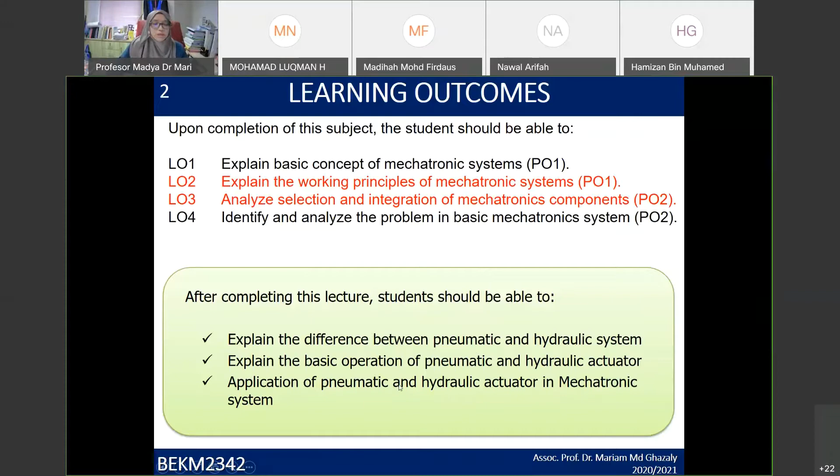So let's just do a recap on what you have learned previously. By now, up until this week 8, you have known that there are three main components in a mechatronic control system. The first one will be the measurement system over here. Second one will be the actuation system. And third one will be the complete system, which is the control system. What you have learned so far was on the sensor, signal conditioning and data presentation system.

And today we are going to concentrate on this actuator system, which is hydraulic, pneumatic, electrical, and mechanism. Why I didn't put the mechanism inside here is because normally the mechanism or mechanical actuator will be included in the actuators, together with the hydraulic actuator, the pneumatic and the electrical. So, actuator. For example, I give you a power steering system.

The previous power steering systems used a hydraulic actuator, but this hydraulic actuator was combined with a mechanism, a mechanical actuator, having gearing and a rack and pinion. So this is what we call a combination of actuators under one system. Power steering systems have hydraulic plus the mechanism.

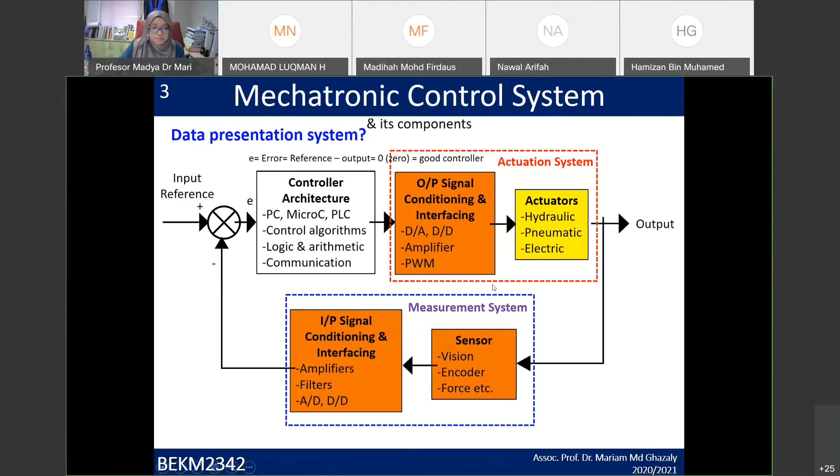Okay, so here we go. What are actuators? Actuators are devices used to produce mechanical movement or motion in a system.

For example, you have a mobile robot. How does a mobile robot move? You need to have a DC motor. This is what it means to produce mechanical movement or motion in a system, so it's going to move its place either left or right depending on what type of mechanism movement you choose. There are only two types of movement, which are linear and rotary.

Second, the input is generally an electrical signal, air pressure, or fluid motion. This is the input to the actuator. For electrical actuators, the input is an electrical signal, either voltage or current. For an electrical motor, normally it's current as the input signal. For voltage, for example, a DC motor is voltage. And air pressure, where does the input air pressure come from?

Air pressure is for a pneumatic actuator. And for fluid motion, or we call it fluid pressure, compressed fluid, this is what we call a hydraulic actuator.

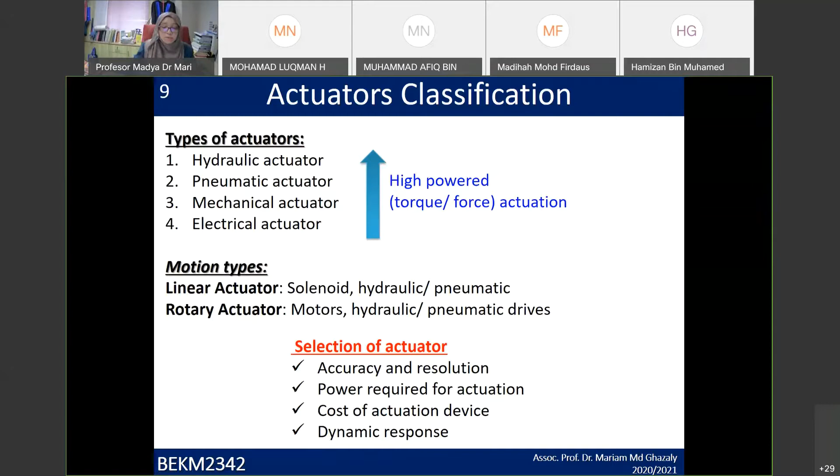Okay, Afiq, do you want to say something? Is your mic on? Alright, so...

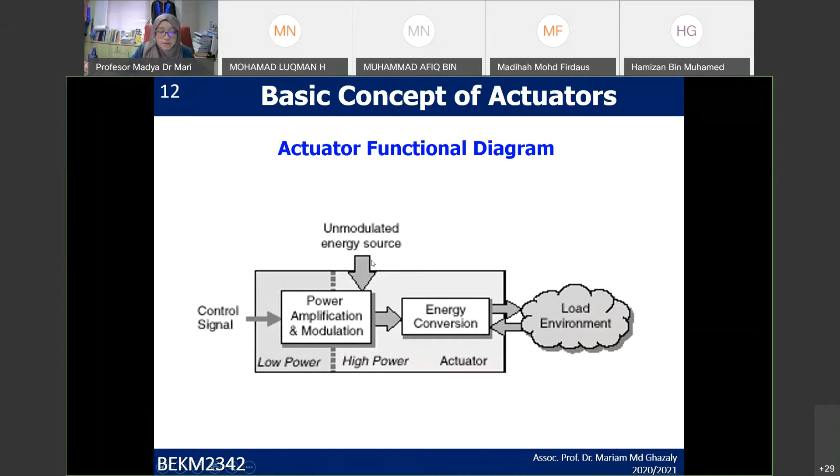And we have the control signal. Is it low or high? If it is low, then you have to have the amplifier, and this is where you have the signal conditioning. If there is noise, then you need to filter out the noise. External energy sources, this is an example of what I mentioned about the external disturbance.

Now we go to the interesting part, which is the types of actuators. I mentioned only three main actuators: pneumatic actuator, normally we call it a cylinder. Then we have the hydraulic actuator, we call it cylinder or motors, normally cylinder as well. And the third one is electrical actuator: DC motor, AC motor, stepper motor. Sorry, typo error.

So where is the mechanical actuator? The mechanical actuator is embedded in all these three actuators. So if you ask how many types of actuator, there are actually four: pneumatic, hydraulic, electrical, and mechanical. But we don't call it a mechanical actuator, we call it a mechanism. Under pneumatic and hydraulic actuators, we have two normal types: single acting actuator and double acting actuator. Let's look at what that means later on.

So what is a hydraulic and pneumatic motor? Pneumatic power is an air powered cylinder, meaning the input to the actuator is compressed air. Imagine that you have a bottle, or a syringe for example. You put air in and then you press it, then you will feel the force there.

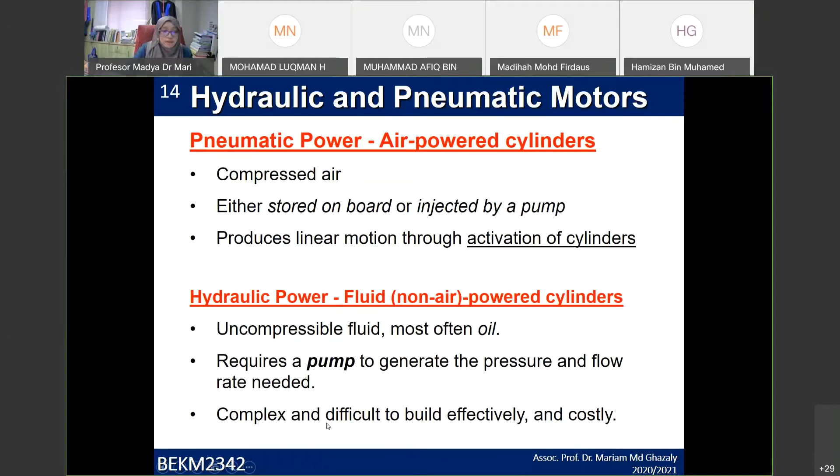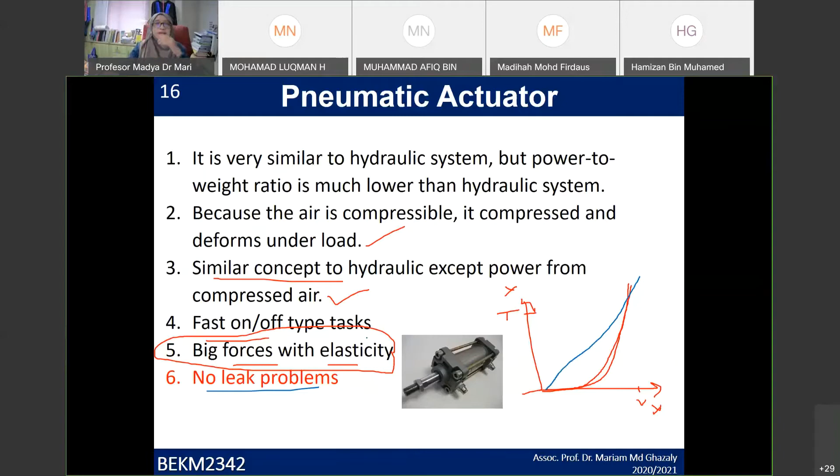That's why sometimes if your hydraulic system is leaking, then you have the fluid going out. Then you cannot apply the brakes, because they're leaking. The fluid is going out, and you cannot actually compress the liquid anymore. So that's why sometimes you have a faulty braking system.

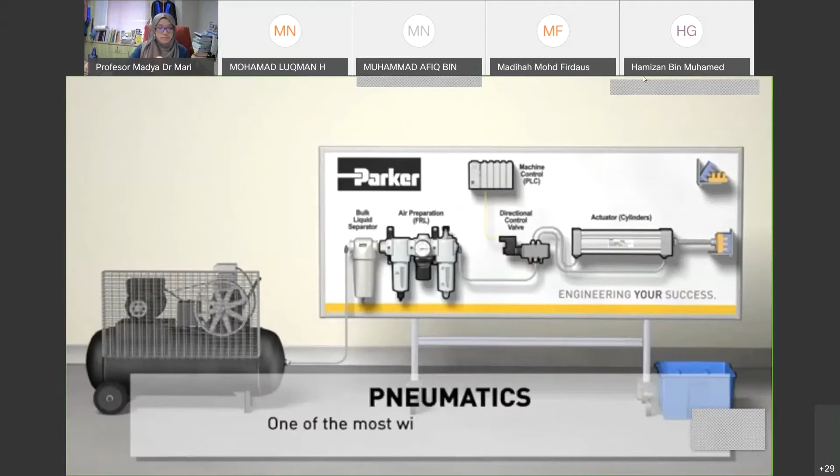Common elements used in these systems. The ultimate goal of this entire collection of components, in most cases, is to create motion that will do some type of work in an industrial setting. Pneumatics is one of the most widely used technologies to automate repetitive processes. Some common applications might be to move product from one place to another, or to press or clamp pieces of a product together. To best understand how the system works, we will start at the beginning with the compressor and follow the process through to the end goal of motion.

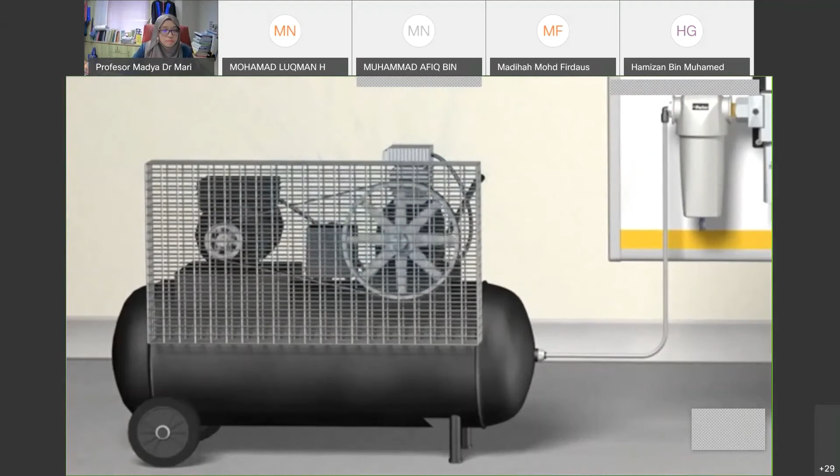The compressor generates the energy that powers the system in the form of compressed air. In order to generate compressed air, the compressor draws in atmospheric air from its surroundings and squeezes it or confines it into a smaller space, creating the energy needed to drive the system. Once compressed, the air needs to be dried and cleaned so that harmful particulates such as rust or dirt do not clog up the moving parts of the system. The compressed air will travel through a tube or line to the next component, called an air preparation unit, or FRL. FRL is short for filter, regulator, and lubricator, which are common pieces that make up the air preparation unit.

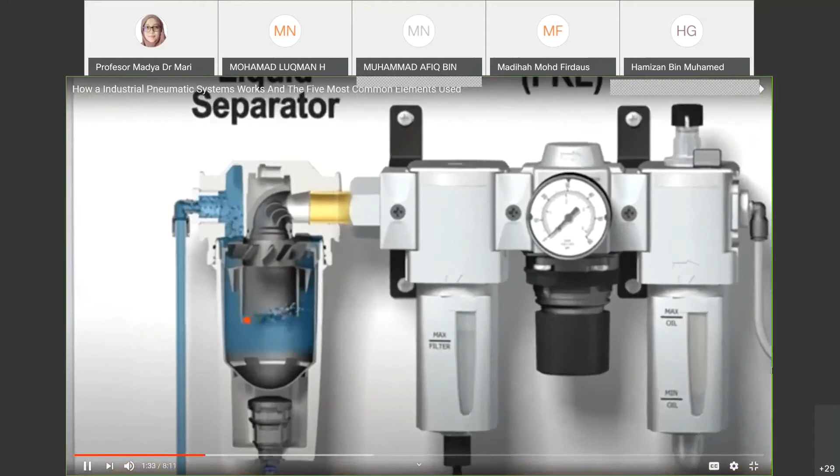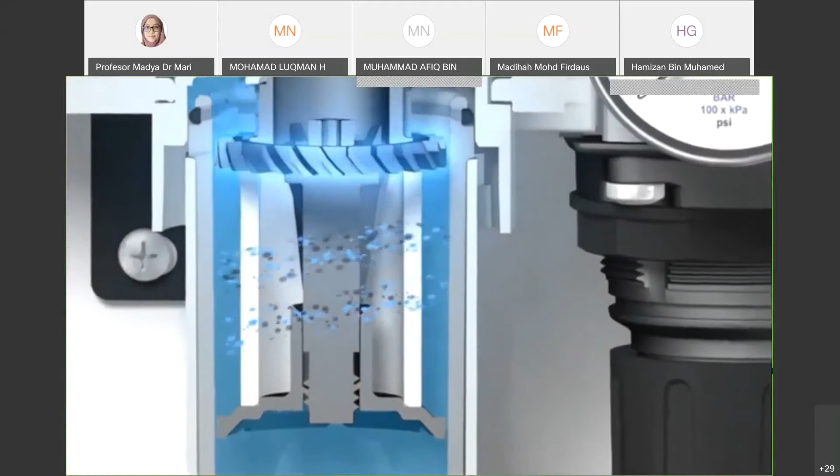Typically, the first unit in the air preparation system is what is called a bulk liquid separator, which circulates or spins the air using specially shaped vanes. The rapid circulation of the pressurized air sheds unwanted moisture due to centrifugal force. The next unit is a filter, which further removes particulate and moisture in a two-stage process. Just like in the bulk liquid separator, a series of vanes or louvers in the filter circulates the air in the first stage. In the second stage, the air passes through a screen of sorts, called an element, in order to catch unwanted debris.

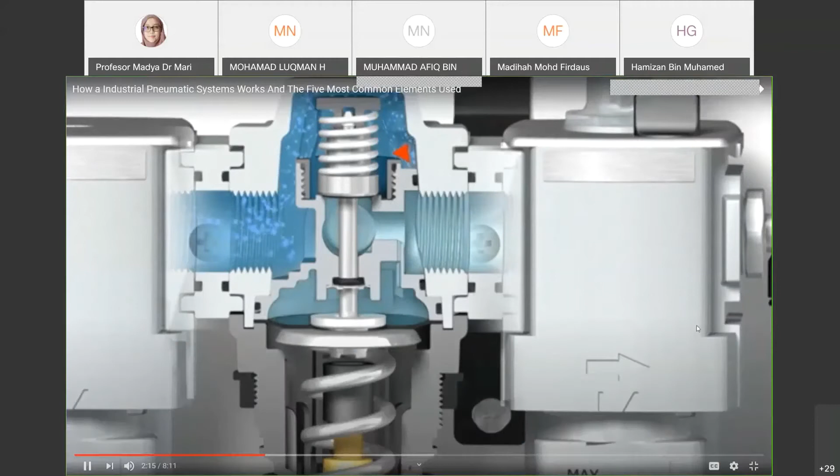Once dried and cleaned, it is common to adjust the level of air pressure coming out of the compressor. This adjustment has an impact on how much force the system generates. Higher pressure allows the actuator to put out more force, and lower pressure creates less force. The regulator achieves this using a spring-loaded assembly. The knob on the regulator adjusts the force of the control spring to achieve a desired pressure set point. Whenever the downstream pressure level drops lower than the desired set point, the poppet, or internal valve, opens a pathway for the higher pressure upstream to flow downstream. This continues until the pressure in the system reaches the regulator's set pressure. At this point, the poppet or internal valve closes until there is a new downstream demand. It is also common to have a pressure gauge on a regulator so the user can monitor downstream pressure.

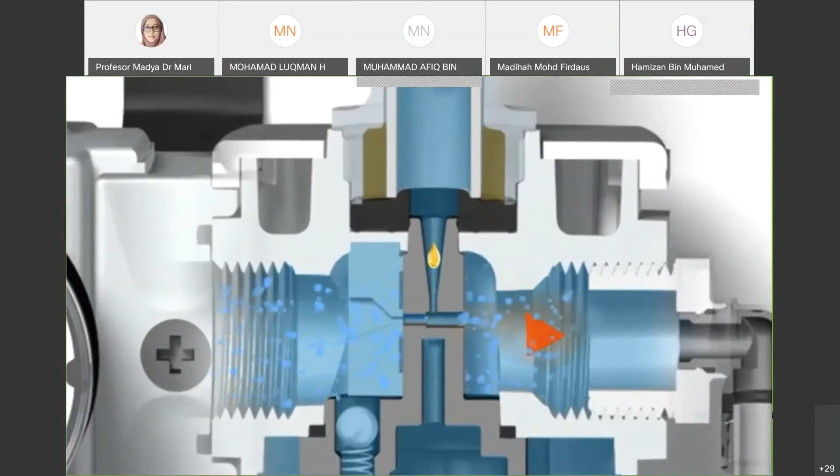Finally, in specific applications, such as air motors or pneumatic tools, a lubricator can be added to distribute a fine mist of lubricant into the compressed air to help lubricate downstream components. Now that the compressed air is clean, dry, and set to the correct pressure for the application, the next step is to direct it where to go to create motion. A directional control valve is used to achieve this task. This directional control valve has a series of internal pathways that can connect the air coming into the inlet port with one of two avenues to leave the valve, called working ports.

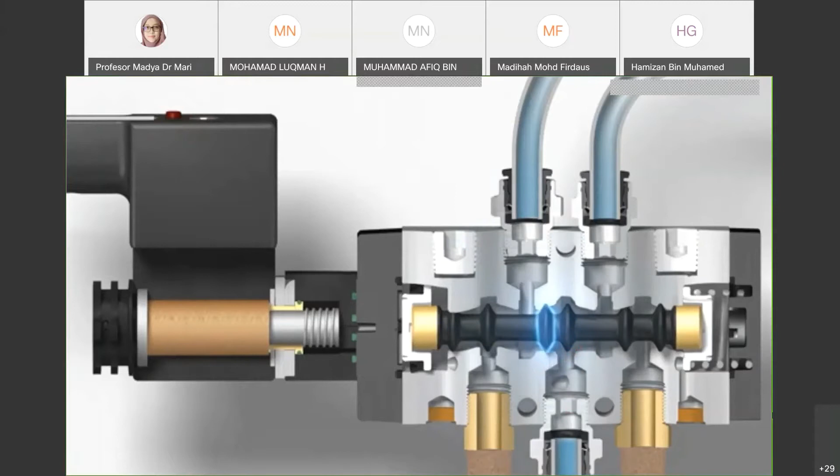Depending on the position of the moving element, which is typically called a spool, the air will be blocked from traveling down one pathway and allowed to travel down the other. The high spots on the spool, called lands, will block the air from proceeding down one path, while the lower sections on the spool, called grooves, will allow air to flow around them and proceed to one of the working ports. In this common type of valve, when the unit is not activated, the spool is forced to the left side of the valve by a spring. In this position, you can see that this land blocks air from going out the number 4 working port, and instead is forced to go out working port number 2, because the grooved lower section of the spool allows air to flow past it and out to the number 2 working port.

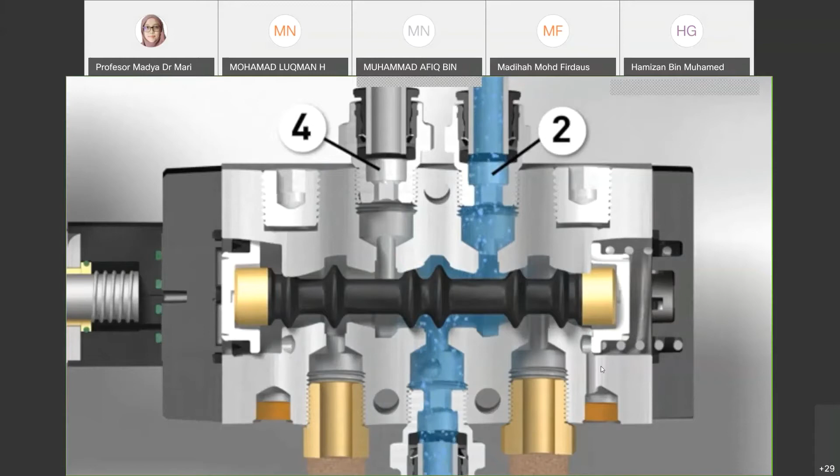In order to change the direction of the air to the number 4 working port, the valve needs to be turned on. In most automated equipment, a PLC, or programmable logic controller, will instruct the valve to shift using an electrical signal. When the signal arrives at a portion of the valve called a solenoid coil, a magnetic field is created that pulls a cylindrical piece called a plunger towards it.

When that plunger is unseated, it allows air from inside the valve, known as pilot pressure, to push the spool to the right. Once the spool reaches the far right side of the valve, the lands or high spots are now closing off the passage to the number 2 working port, and instead directing the compressed air to flow to the number 4 working port.

When the signal from the PLC is removed, the force generated by the electromagnet is also removed, at which point the spring on the plunger returns it to its normal state, which removes the air signal that is pushing on the spool. The spring on the opposite end will return the spool to its default position once again, directing air back out the number 2 working port. The PLC can now direct air to whichever port is needed, whenever it is needed.

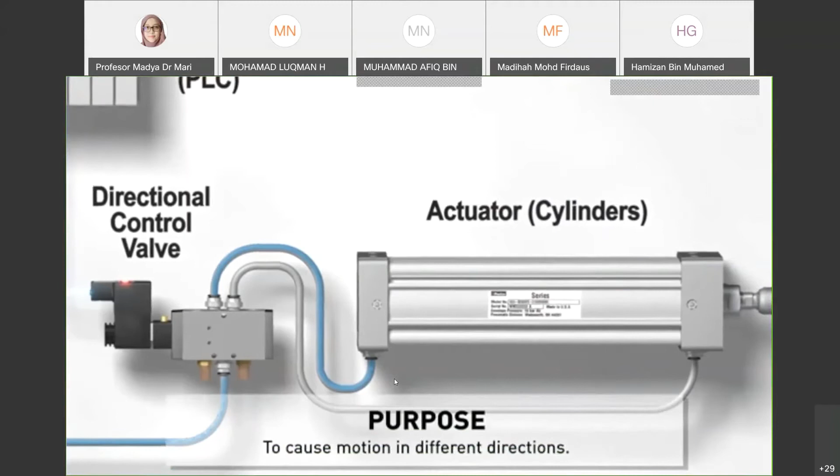The next component in the system, the actuator, will allow us to do some useful work with the air we compressed, cleaned, and redirected. In most applications, the purpose of changing the direction of the compressed air with the valve is to cause motion in different directions. Parker makes a wide variety of actuators, or cylinders as they are also commonly called, that will convert compressed air into motion. The most common type of cylinder is the rodded variety displayed here.

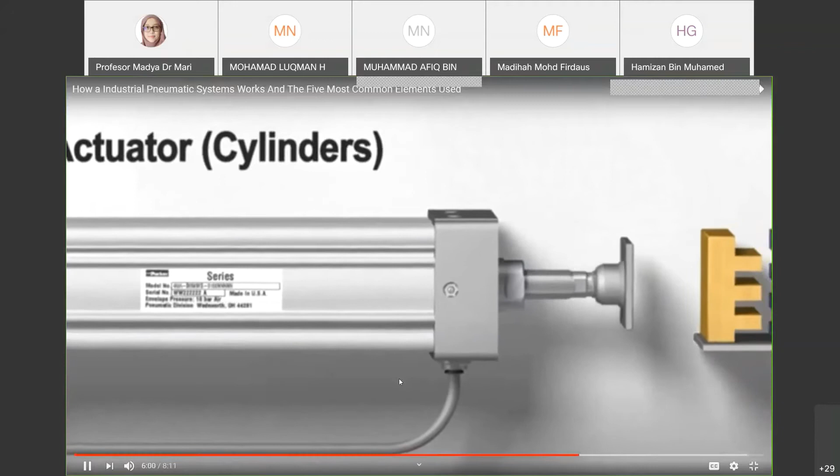The actuator will create motion using the energy of the compressed air that is supplied to it by the directional control valve. We can see that the working port number 4 is connected to the back or cap end of the cylinder. When the compressed air pushes on the piston, it is forced to move forward inside a hollow cylinder that is commonly called the body. The piston is attached to a rod that will extend as a result of the force generated by the compressed air acting on the piston.

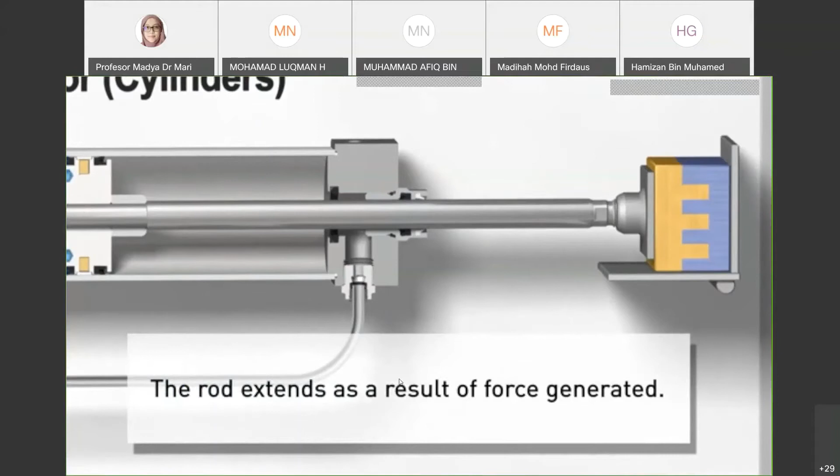The actuator will continue to move in that direction until it reaches its physical limit, or if the force resisting motion, commonly called the load, is higher than the force of the compressed air, in which case the pressure regulator can be adjusted to a higher pressure. Now that we have completed the extension, we will need a method to retract the actuator to its original position. The directional control valve will achieve this by changing the direction the compressed air flows from number 4 working port to the number 2 working port.

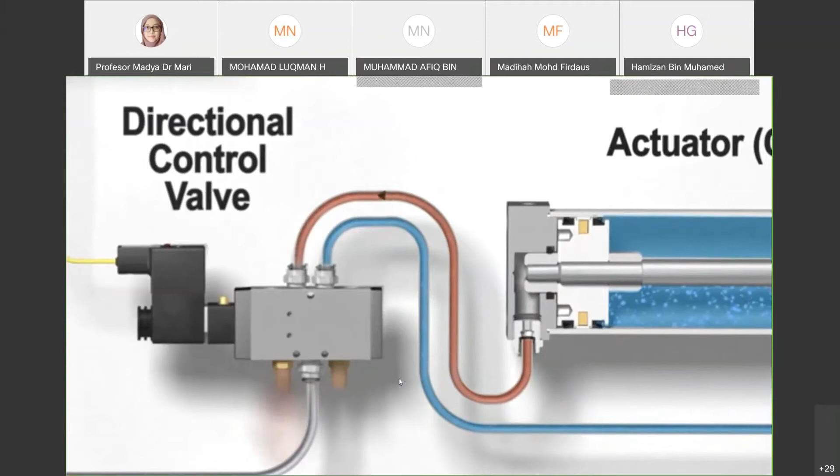The number 2 working port is connected to the head end of the actuator, and when the compressed air pushes on the opposite side of the piston, it will reverse the direction of the piston rod assembly. This reverse motion is typically referred to as retracting. For this actuator to retract, the air that is already filling the cylinder needs to go somewhere, which is commonly referred to as exhausting. The exhaust air is illustrated by the red color and is shown exiting the cylinder and flowing back through the valve, out the muffler to the atmosphere.

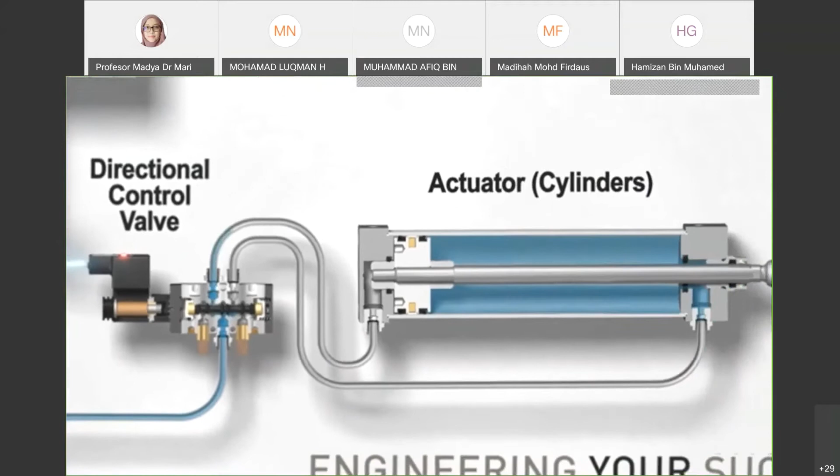This system can repeat this process as often as the PLC tells it to move things from point A to point B in one example. In this example, the PLC is telling the actuator to move this product by sending a signal to the directional control valve, which is using the clean, dry, compressed energy to power the actuator. Pneumatics are also commonly used to press two components together in an assembly process to help form a finished good.

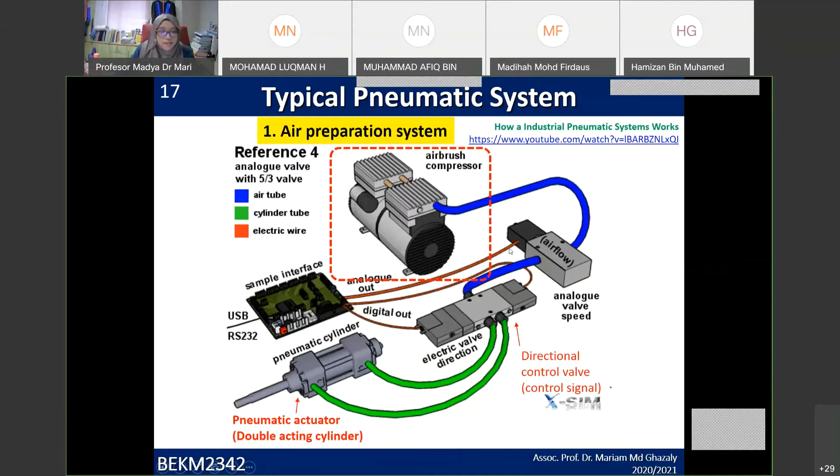All right, so you have seen the video just now. So basically the video explains each of the components. It's explaining the air preparation system, the valve, and the actuator. So what it explained just now is the working principle of the actuation system. So I'm going to skip here, because it's already been explained, so you have the air preparation system.

You have, if you see in the video just now, the filter to filter the air from dust and then filter it out from moisture. So it's the air going into this valve. This tube will be clean air, and then it will move to the control valve over here.

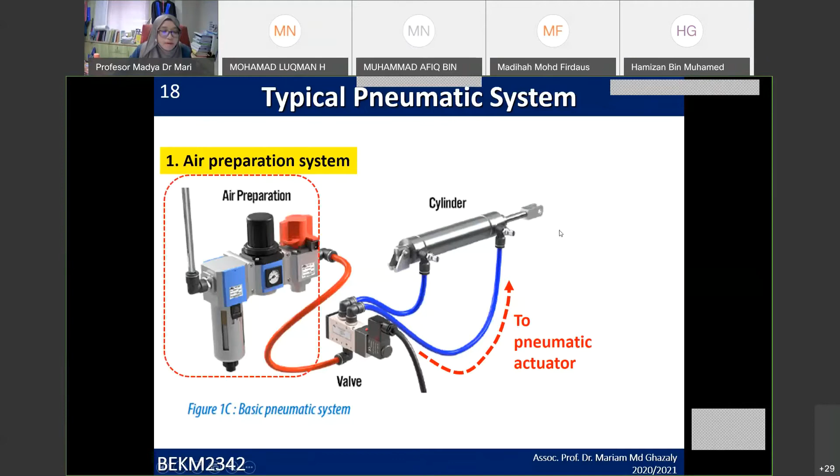In the control valve just now, you see that the input to the valve is only one port, and the output is 2 ports. On each port, you have the exhaust valve, which is where the air goes out after each direction. Depending on how you control the control valve, your pneumatic actuator will move accordingly.

To compress the air, you need a motor. That's why a motor will be attached to the compressor.

This air will go to the cooler. The cooler is to cool down the air if its temperature rises, so the air will be cooled down.

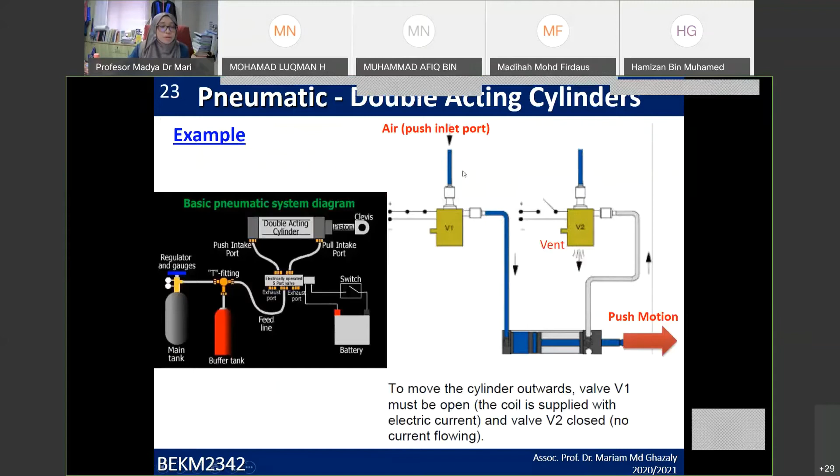This one is an example of dual direction motion, similar to what you've seen here. You have two ports for compressed air, first one and the other. In this case, the air inlet is also used as the exhaust valve, but the principle is the same: when compressed air moves inside here, the shaft or mechanism will pull. When you insert compressed air into the other spot, you get the push motion. So this is the dual direction motion, similar to what you saw in the video. I won't explain further, just read through and look at the figure.

We skip that. Now we go to an example of advanced pneumatic actuator. The common pneumatic actuators are double acting and single acting, and then we have the advanced pneumatic actuator, which we call the pneumatic muscle actuator.

For this pneumatic muscle, the retraction strength of the PMA is limited by the sum total strength of individual fibers in the woven shell. This means the PMA, pneumatic muscle actuator, is similar to a human muscle. It's not made from mechanical parts, but mostly from fiber, meaning it expands like a fiber.

I'll show you one example video. This is one example of a PMA made by Festo. These are a few different types and sizes of this actuator, and they are connected to the hand part here. If you see, it's connected to the hand, so each one will pull the finger to make a motion.

This is an example where you can set up the PMA in this setting, connected to a shaft here, a bearing or joint, and this shaft will rotate the robot manipulator. The air source comes from the compressor, then through the valve, which gives the PMA the compressed air.

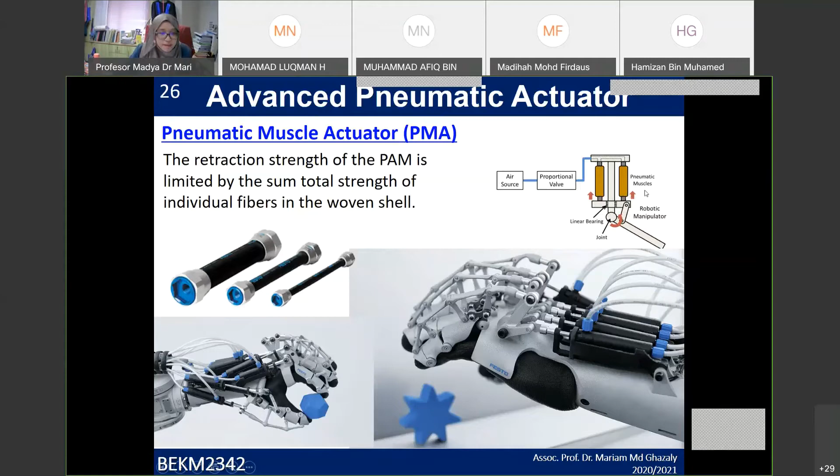I'll show an example. This is a PMA setup done in a lab. Here, you want to use a linear actuator and convert it into a rotary actuator. To do that, you need to add a mechanical linkage, or mechanism. Linkages are mechanisms, and this can make the actuator move. The actuator is basically moving in linear motion, but we want to control the rotary motion.

Let's look at this example in the video. This was done at the University of Tokyo, Japan. As you can see, it's very noisy - that noise is from the pneumatic actuator, the PMA.

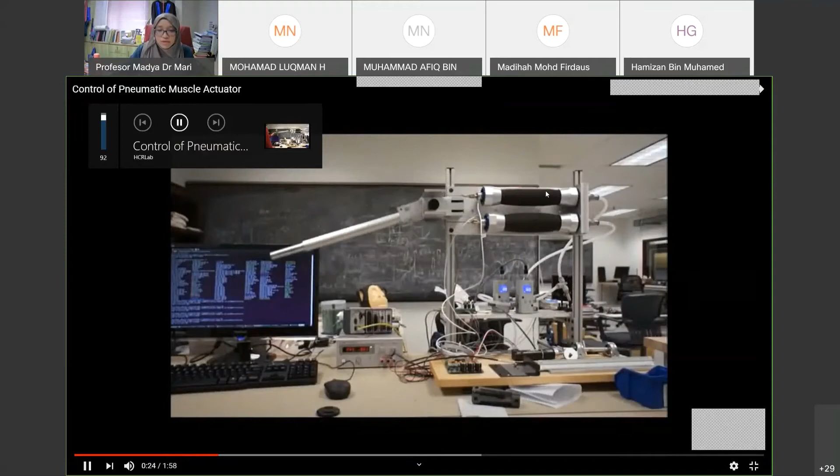These are two PMAs set up in this condition. You can see each PMA flexing and extending accordingly, like a human muscle. Because of the way this PMA is attached to these linkages, it will pull the wire, which pulls this encoder to give a rotary motion.

You can use an electrical motor directly to make a rotary motion, but an electrical motor does not have high torque - the torque is very low. So for cases where you want high torque, to pick up a higher load, you would implement the PMA.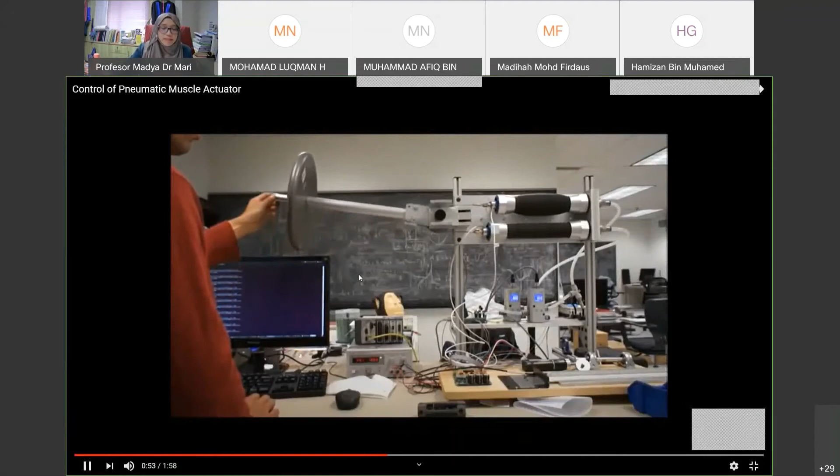When you implement the PMA, this example adds a weight at the end effector. You can see it can actually move the weight at the end effector - it's capable of that. So you get the idea.

Okay, so summary, pneumatic actuator advantages: the input is compressed air, which is cheap and does not need a reservoir, compared to hydraulic. In hydraulic, because the input is liquid, you need a reservoir, which is a place where you put the liquid. Advantage is it's clean because it's air, relatively fast, easy to control the force, suitable for force feedback.

Also, there's no need to generate a magnetic field, compared to an electrical motor, where you need to generate a magnetic field.

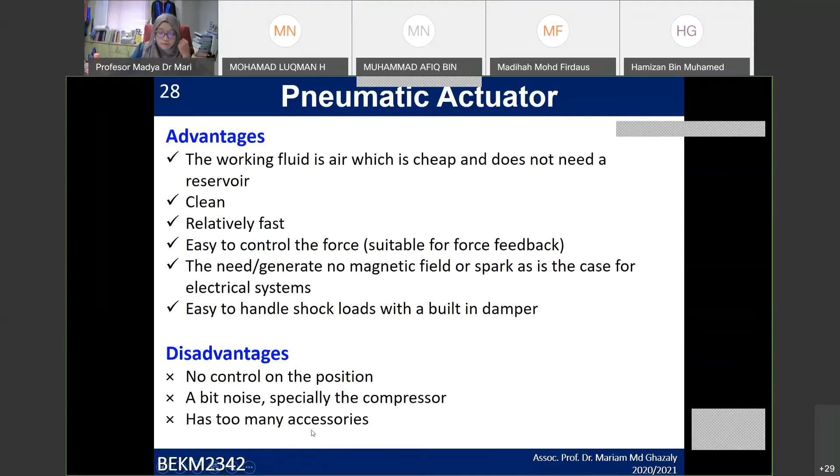This is an example. I want to show you the uniqueness of the pneumatic actuator. I'll show you one video - you can click it on your own later. I'll give you one example so you get excited about this topic, pneumatic actuator.

Productive, intelligent, and perfectly adapted to its environment. Nature is both efficient in its use of resources and fascinating in its variety of motion forms. Natural phenomena are also at the heart of Festo's bionic learning network.

Festo is one company that is developing pneumatic actuators.

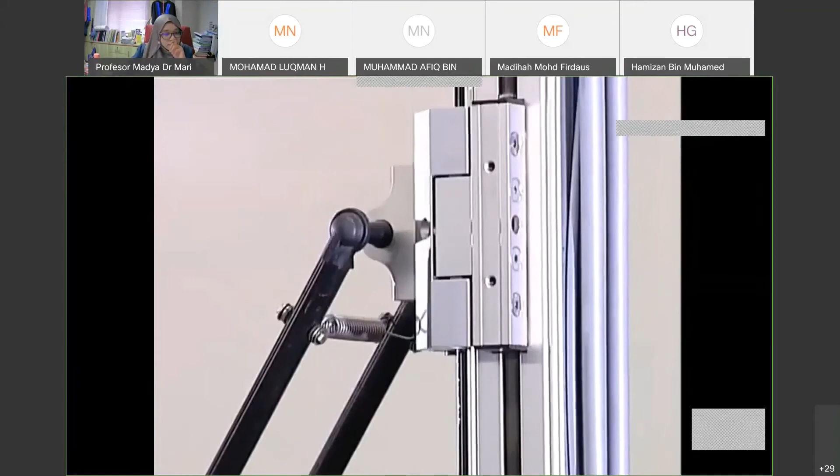Product innovations per year and 2,800 patents - Festo sets the pace for its 300,000 customers around the world in the field of factory and process automation in their quest for maximum productivity. Festo employees are currently researching how automated motion sequences can be made more efficient and energy conserving in future, for example, with the aid of bionics.

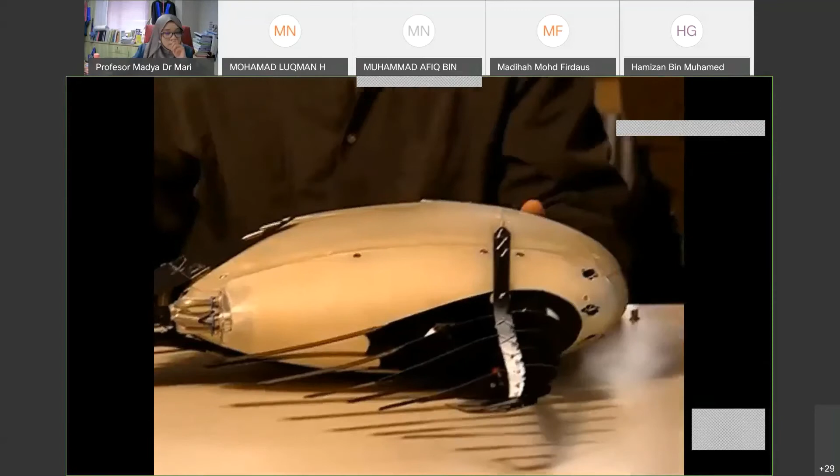Engineers and designers work hand in hand. They make use of what nature has optimized in millions of years of evolution and transfer these principles from nature to the technical products of the near and distant future. The Bionic Learning Network is also part of Festo's commitment to technical education and training. In cooperation with universities and research companies, Festo promotes ideas and initiatives which go beyond the company's core business of automation, and which may open up new and interesting application fields for the future.

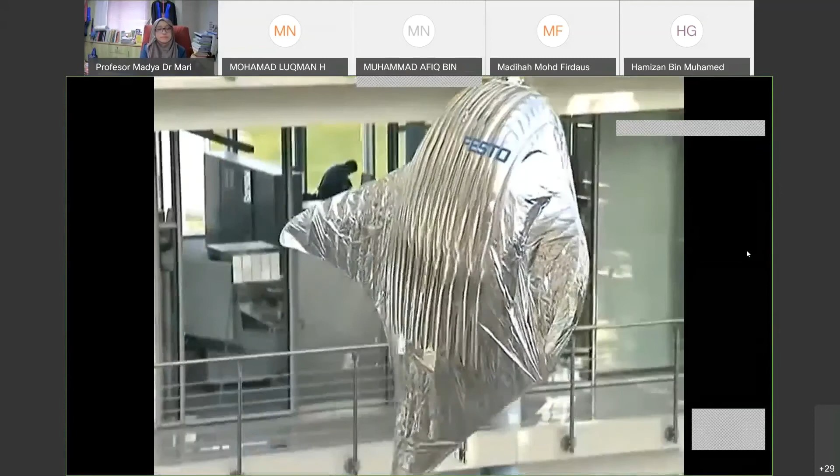The prototypes utilize cutting-edge technology from Festo. Bird flight was the inspiration for the development of the air ray, and yet its form resembles that of a manta ray, a form which has been continually streamlined over millions of years. Filled with helium, the extremely lightweight ballonette behaves as if it was swimming in water. The remote-controlled hybrid construction uses the so-called fin ray effect, similar to the flapping wings of the manta ray.

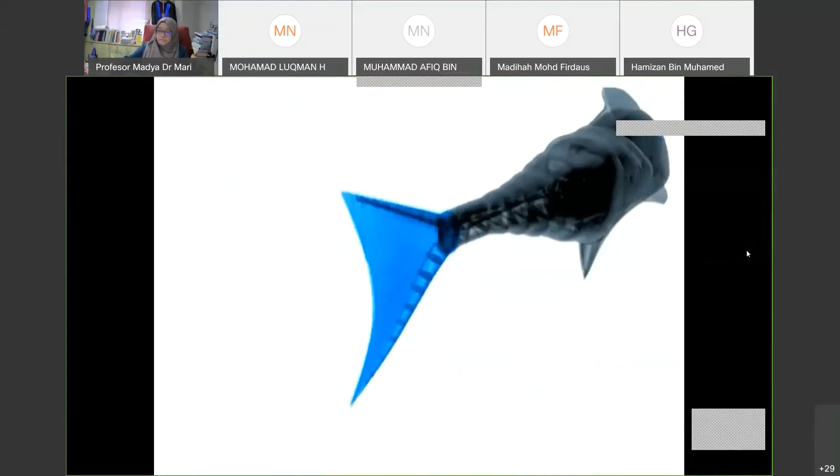The fin ray effect is a construction derived from the anatomy of the fish fin. It enables the air ray to make flying maneuvers similar to those of birds. The fin ray effect has also found initial practical applications in the field of automation. With the aid of Festo's bionic adaptive gripper, sensitive parts can be carefully...

Okay, if you see here, this is an example of the fin ray. Inside here, they have the pneumatic muscle, PMA. If you see this one, the fin over here is actually a mechanical linkage.

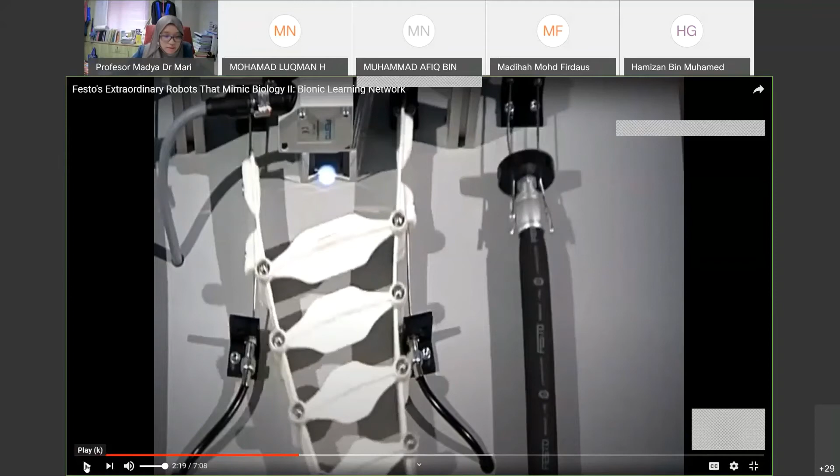Sorted in a single step. A completely different drive concept has been realized with the bionic airfish. This project combines bionic refinement with an unusual drive form originally conceived for space travel. The flow-optimized structure is based on the shape of a penguin. The innovative bionic plasma undulating drive in the stubby wings simulates the mechanical wing motion of birds, but without moving parts. Flow phenomena also play a major role in valve technology. The bionic airfish serves as a prototype to examine the reduction of flow resistance with ion beams.

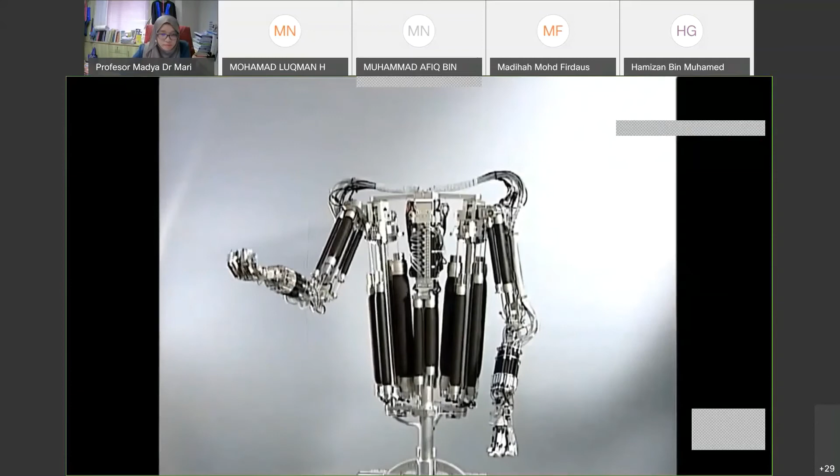In the case of the humanoid, the task was to transfer the biomechanics of the human musculoskeletal system to a technical construction. The key element for the realization of this aim is Festo's fluidic muscle. Already a permanent feature in production systems, the fluidic muscle is proving to be a universal tool in a surprising number of new applications. It's simply a completely new type of pneumatic drive.

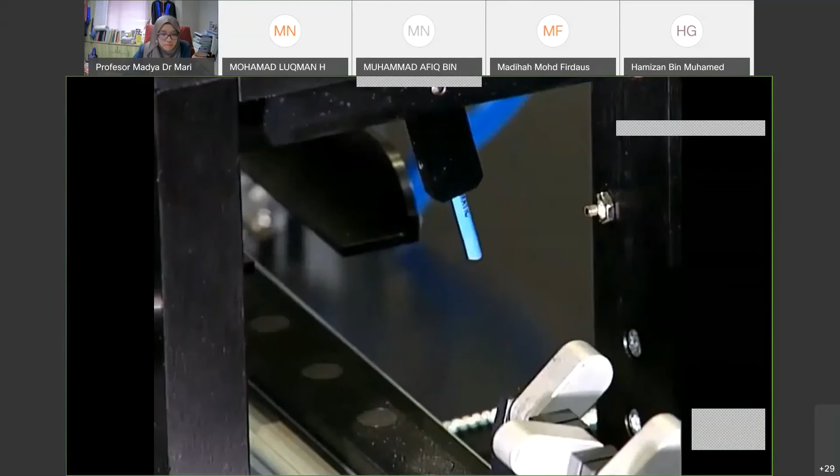Its properties are similar to those of a real muscle, but it's operated with air. When the fluidic muscle is filled with air, its diameter increases and the length contracts. This enables flowing and elastic motions. The initial force of this artificial muscle is extremely high, and its dynamics resemble those of the human muscle.

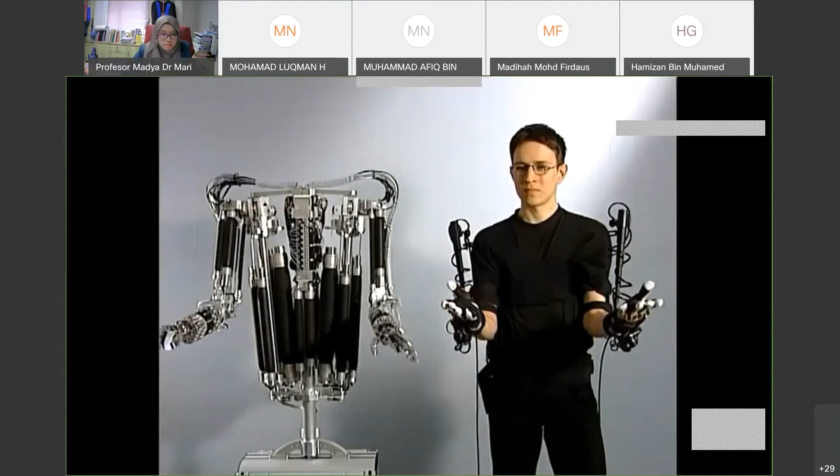The humanoid can either follow pre-programmed motions or be controlled in real time via a data suit and data gloves. This means it can be used in places which are either inaccessible or too dangerous for humans. They're using master or slave.

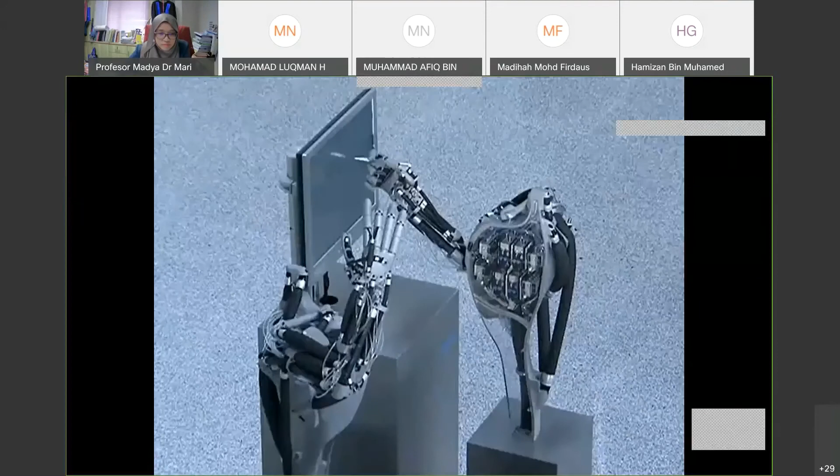Airic's arm also utilizes the fluidic muscle. It attempts to simulate as closely as possible its human role model. With the aid of Airic's arm, even more complex movements will be made possible. 30 artificial muscles move the bone structure and joints, a construction not encountered in this form in the world of technology. In combination with Festo's latest piezo-proportional valves, this technology enables precise control of the construction's forces.

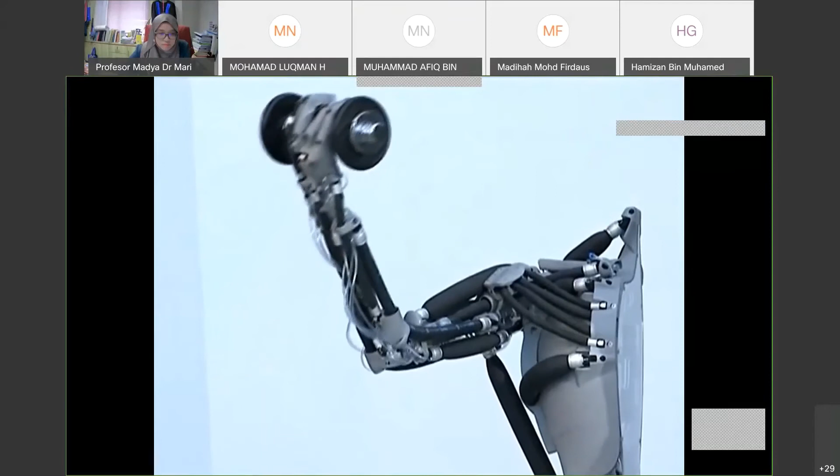Coordination of the muscles and valves is made possible by cutting-edge mechatronic systems and software. Airic's arm is also of great interest to the future of robotics, as it can interact almost naturally with humans.

Okay, take note, how many types of robot are inside here.

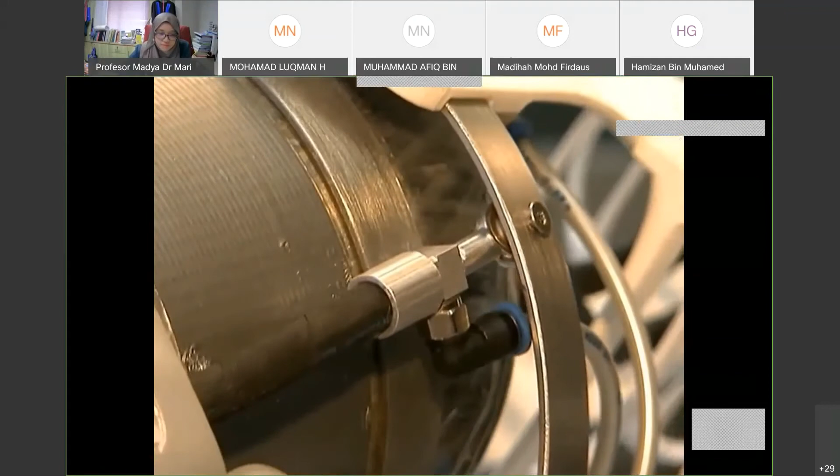Okay, you see this example, this one is actually the pneumatic muscle, PMA. So compared to the normal pneumatic actuator, which is very solid and cannot bend, the PMA is actually very flexible. So this is the advantage of the PMA. Of course, PMA is quite expensive compared to the pneumatic actuator. We have a few PMAs in our lab.

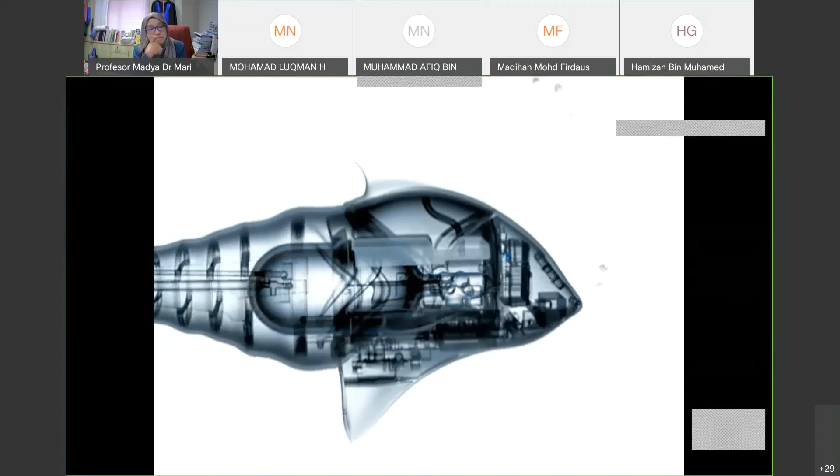Control the steering movement. Once again, the fin ray effect provides the necessary propulsion. A bottle housed inside the fish supplies compressed air to the artificial muscles and the air bubble. Sensors measure the depth and control the valves. The air bubble is flooded with water to make the fish dive, or with air to make it rise.

Even more agile is the Aquaray, a remote-controlled fish with a water hydraulic drive unit, whose form is modeled on the manta ray. The ray is regarded as a highly skilled underwater acrobat. Its wave-like motion provides maximum thrust with a minimum of effort.

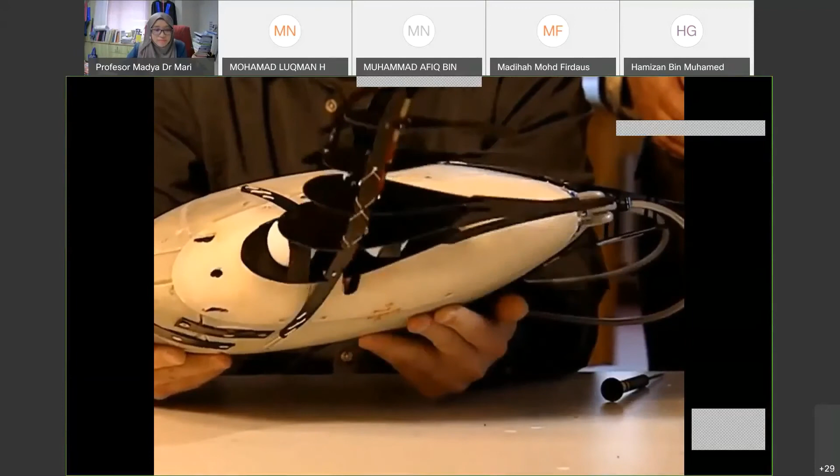Okay, this one is not a fish, it's a robot. By using new types of elastic materials and a deformable skin, it's possible to accurately emulate the swimming kinematics of the natural model. Uses in marine research applications are therefore feasible, as the Aquaray can glide through the water without disturbing the natural environment.

Whether on Earth or in space, in the depths of the ocean or high in the sky, the new drives of Festo's bionic learning network are all inspired by nature. In this way, we can develop new approaches for energy-efficient products of the future. But the researchers of the bionic learning network also have another aim. They want their projects to make technology exciting for young people. For only enthusiastic young technicians and engineers can one day turn these visions into reality.

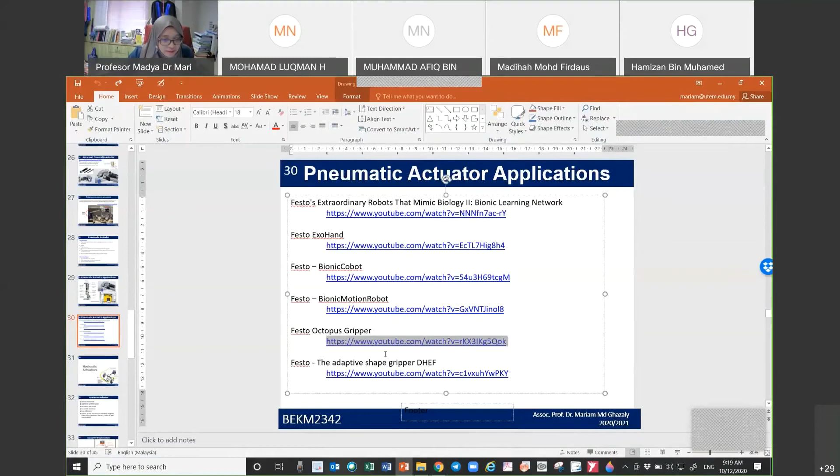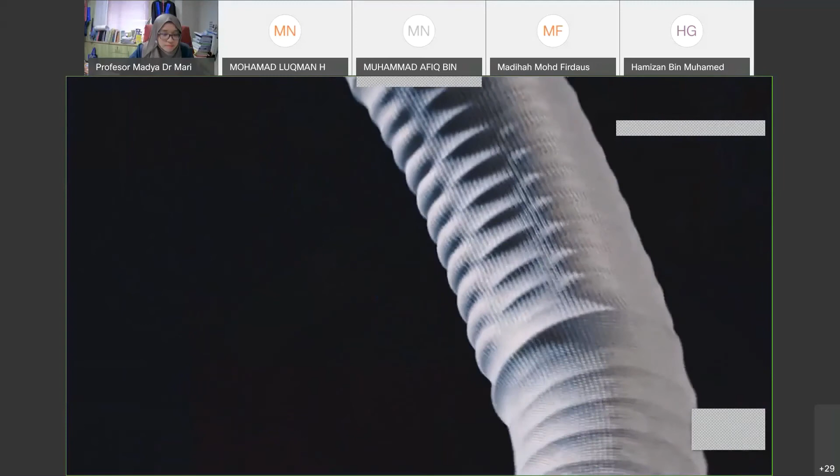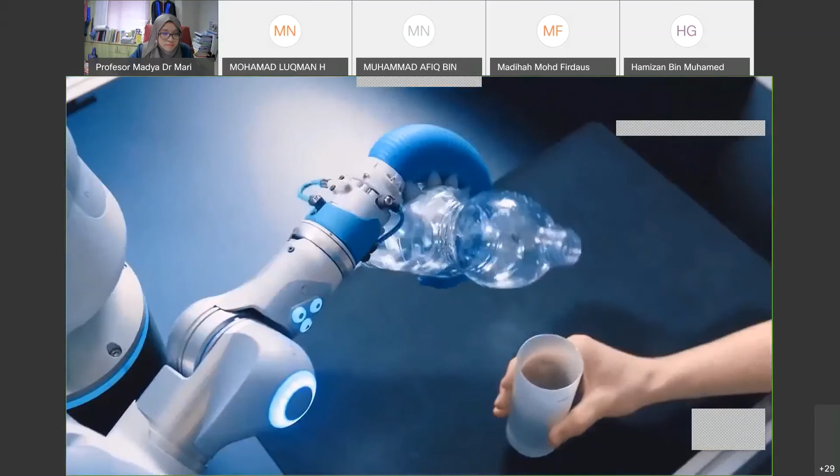Right. So, interesting video. I'll play another interesting example. Okay, this one is also Festo, the octopus gripper. Okay. All right. So you can go through this slide later on and look at the video.

Okay, let's look at what hydraulic actuators are. Normally it's linear movement. Big forces without gears, no need for gearing. Actuators are simple, actually similar to pneumatic. In mobile machines, for example, you can find it in a tractor, or very large cranes. Low efficiency, however, but because it's high torque, it normally compensates for the low efficiency.

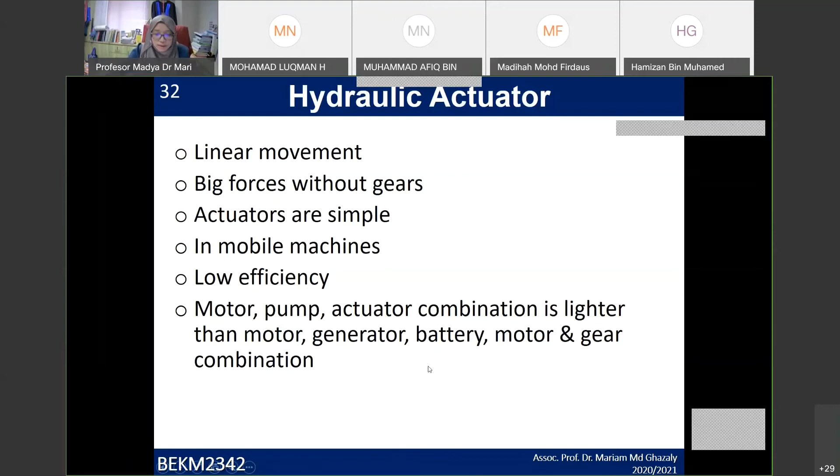And this is an example of dual direction. It's similar to pneumatic, so I'm not going to explain it. We have the single acting actuator, which we call a plunger, or a piston with only single acting. For single acting, most of the time you will have a spring over here. When compressed liquid is directed into this spot, the plunger will move to the left, and after the compressed liquid goes out through the exhaust valve, the spring will retract it back to the normal condition.

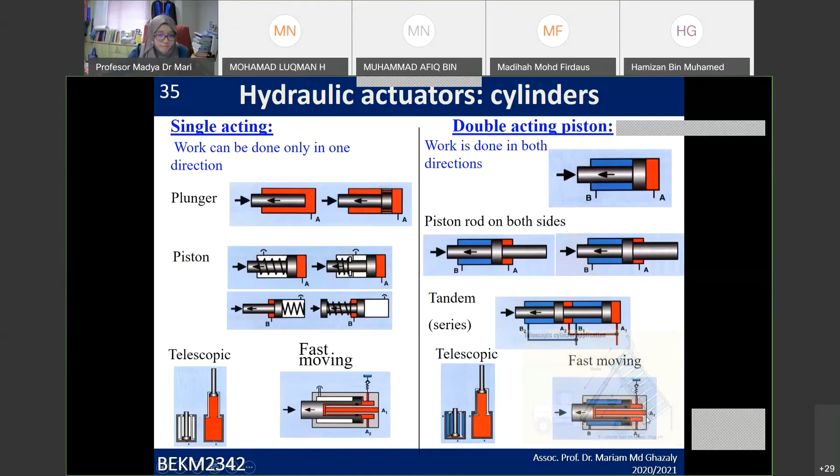So this is just a very simple calculation on how to calculate the torque value. dA is the area of this rotary. This is an example of the rotary type actuator.

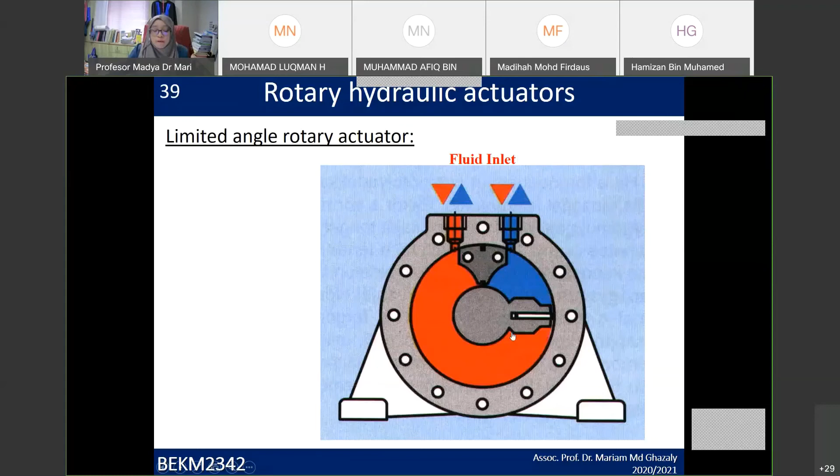And then, other than linear motion, which hydraulic and pneumatic normally use, we also have rotary actuators. The concept is the same. We have two inlets over here. When fluid is directed into this port, the red one will actually rotate this shaft to the full rotation like this. And when you have the fluid inlet into this port over here, the liquid in this blue part will move the shaft to the right side. So this is where you have the rotary motion. And this one is an example where you have two ports, inlet going in and out.

Okay, so the advantage of hydraulic actuator is no problem of misalignment as in the case of mechanical system. It's similar to pneumatic, because it depends on the pressure. Compact and strong, no need to have a gearbox. Of course, you can also add a gearbox if you want. No wear, no rusting as everything is being lubricated constantly. If you're using oil, there should be no rusting, if it's using stainless steel; if you are using normal steel, then it's going to rust. Easy to handle shock load with built-in damper, because of the liquid there. Almost similar to pneumatic, just that it is relatively quiet operation because you don't really need a high compressor for this hydraulic actuator.

Disadvantages are the hazard associated with oil leakage and relatively low accuracy compared to electrical systems, because of the compressed liquid, and hydraulic actuators are used for larger equipment. Need a power pack and hosing, so you need all the tubing. Even for pneumatic, you need all the tubing, valves, and so on, so it's a bit more complex than a normal electrical actuator. It is slow and expensive and needs too many accessories, similar to pneumatic, because you have the air or liquid filtration first, then all the valves, and then the actuator at the end.

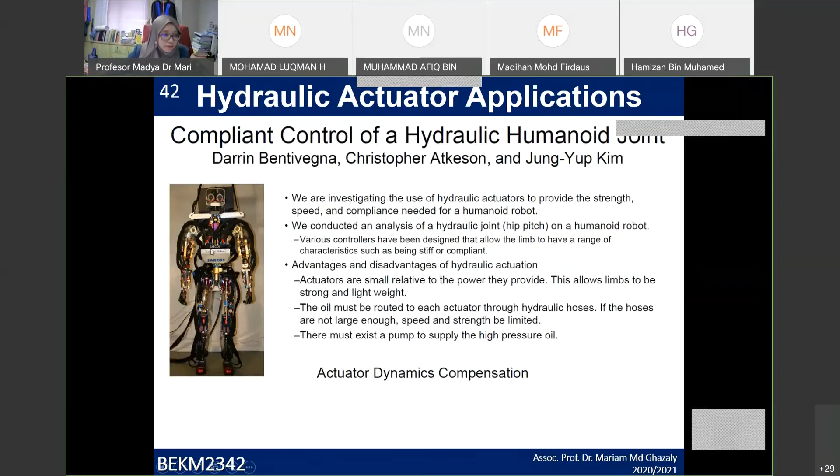Okay, so my question. Okay, I think I left one video on the speed. Okay, this one, pneumatic actuator.

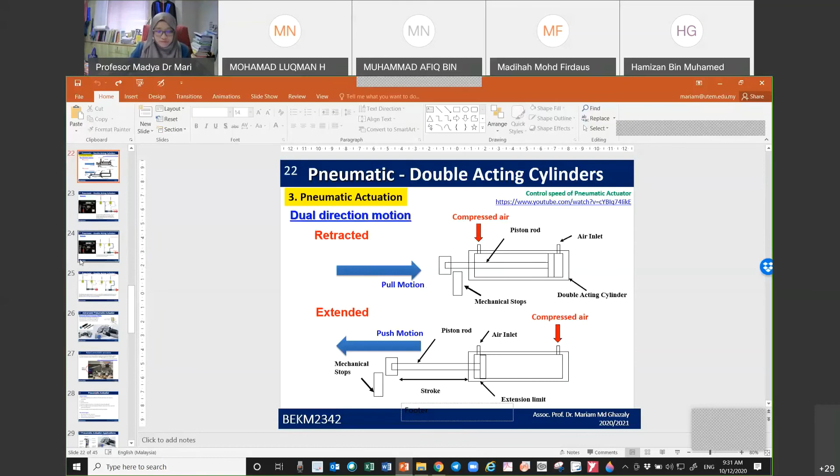How to control the speed of a pneumatic actuator? Just now, you watched the video of the Festo robotic finger, the humanoid robot. You can see that the actuator can move very fast or very slow. How do you actually control the speed of the actuator? One way is to give a specific signal to the valve. So you have the control valve over here. The specific signal is either a small signal or a specific sine wave signal.

Okay, so let's see in this video how you can actually control the speed of a pneumatic actuator. Okay, let's look at the video. Hey guys, Scott from Fright Props here, and today we are going to be talking about controlling the speed of a pneumatic cylinder. So we have a couple cylinders set up here with a couple options as far as controlling the speed. We get this question.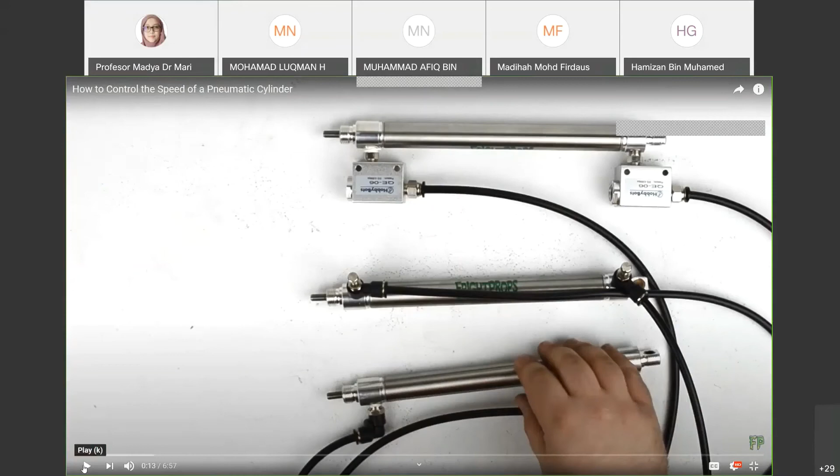Frequently, like, how do I control how fast my cylinder moves? Can I make it go faster? Can I slow it down? And the answer is yes. And here are a couple ways you can do that. So first up, we have a standard double-acting cylinder, and this is just the standard setup. You have the elbows going into the ports here, and if we activate it, you'll see it activates at basically a standard speed.

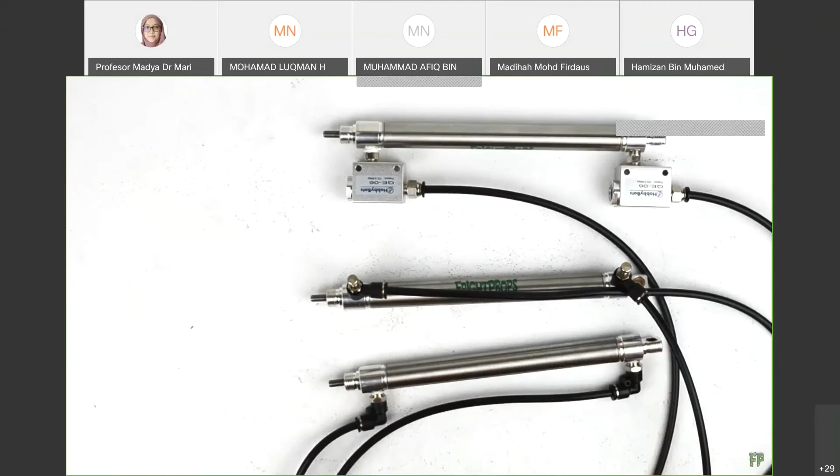Now let's say you wanted to slow that down. You wanted the cylinder to extend more slowly or retract more slowly. To do that, you would use flow control fittings, which we have installed on the second cylinder here. As you can see, these fittings have a needle valve, a dial that you can turn in order to meter the flow of air going into the cylinder.

So as you turn the needle valve and tighten up the passage of air through the fitting, the cylinder will extend and retract more slowly. Now, because these are double-acting cylinders, that basically means that air both pushes the cylinder

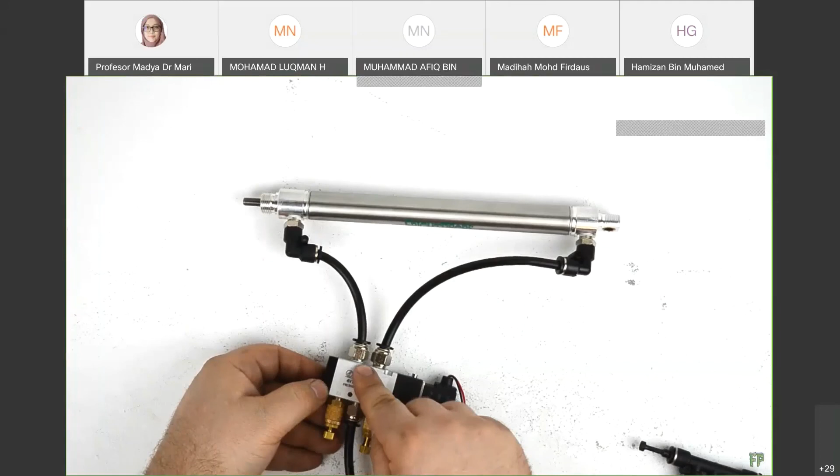So, as always, right. So, where was the question? So the question: how many methods are there to control the speed of a pneumatic cylinder? Explain the pros and cons of each method. So there are a few methods just now, right? Okay, how many methods? Did you jot down?

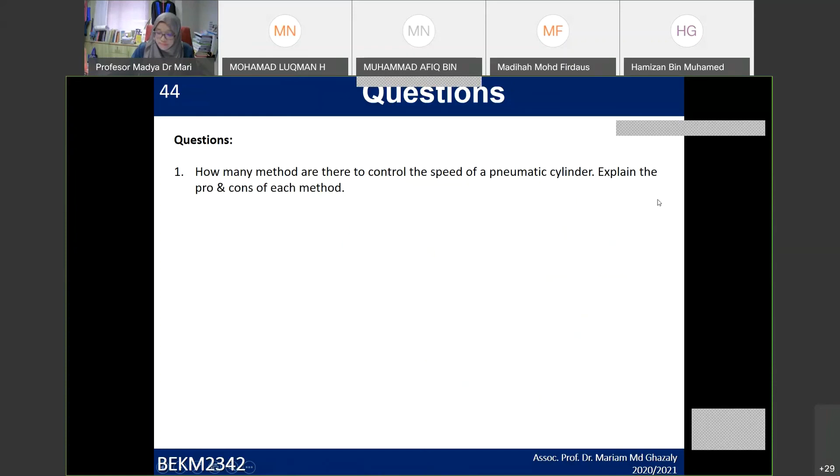How many methods? Guys? Hello? Hello? Hilang lah. No sound. Oh, no sound. You tak dengar? You cannot hear me? Hello? Sekejap eh. Hi? Hello? Guys, can you hear me? Yes, hello, doctor. Can you hear me? Yes. Oh, you mean the video sound? No, there's no sound. Yeah.

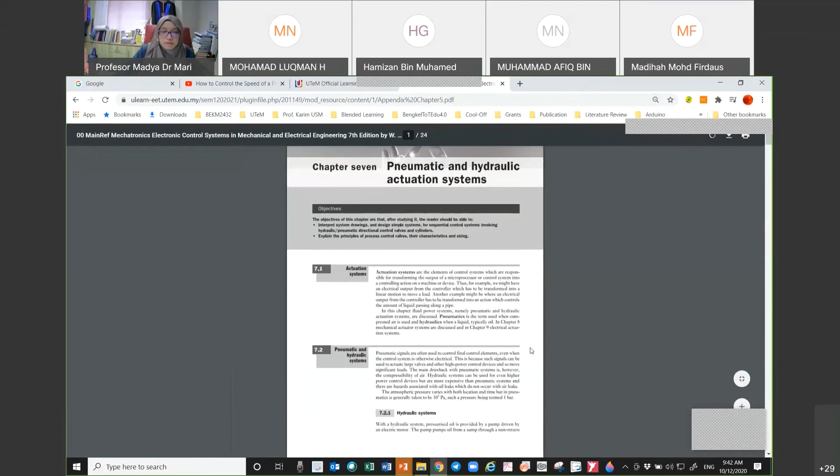So I have uploaded chapter 5. So in chapter 5, you can view that video just now. Go to the pneumatic chapter, the link for that video. And then the appendix I also give to students. This one is like notes that you can read through regarding the pneumatic and hydraulic actuator.

Okay, so for reflection, make sure that you fill in the reflection. So, answer the question. I have asked here how many methods are there to control the speed of pneumatic. So, basically, it's based on the video just now. And then make sure that you submit it.